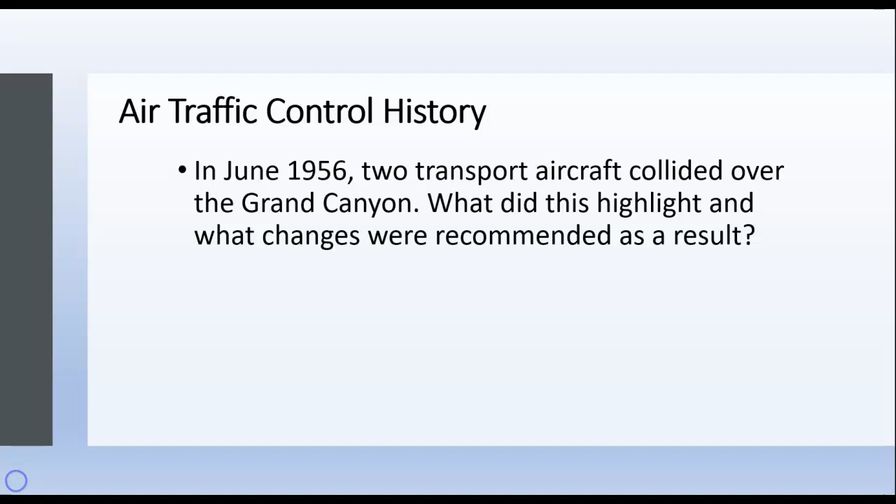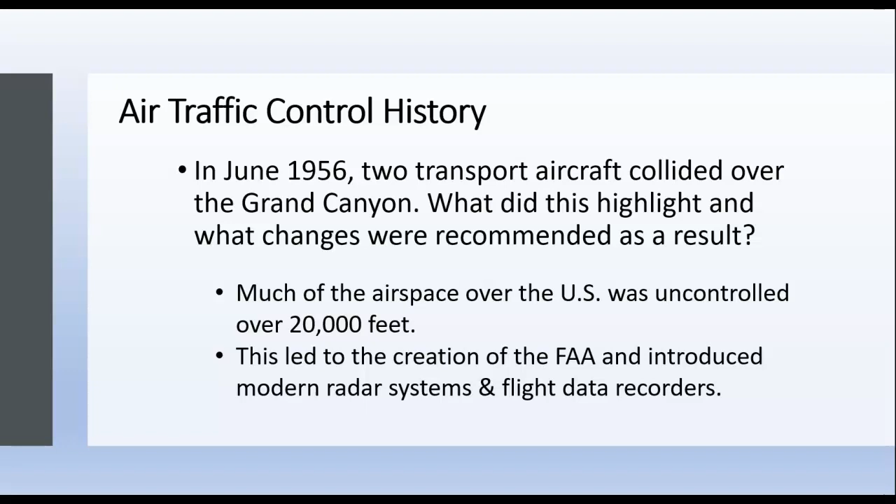In June of 1956, two transport aircraft collided over the Grand Canyon. What did this highlight, and what changes were recommended as a result? Much of the airspace over the U.S. was uncontrolled above 20,000 feet before this time. This led to the creation of the FAA and introduced modern radar systems and flight data recorders. Before 1956, there was no FAA, and no radar systems or flight data recorders in existence at the time. However, in December of 1960, when the FAA was just two years old, two transport aircraft collided again, this time over New York City, while they were in a holding pattern.

Why did this happen, and what happened as a result? One of the aircraft was a DC-8, and it had navigational problems and was flying at excessive speeds. The New York City towers lacked proper surveillance radar, so they couldn't really see the problem as it was occurring. As a result, equipment upgrades were made and new speed limit rules were mandated. This is when the 250 knot speed limit within 30 nautical miles of an airport below 10,000 feet came about.

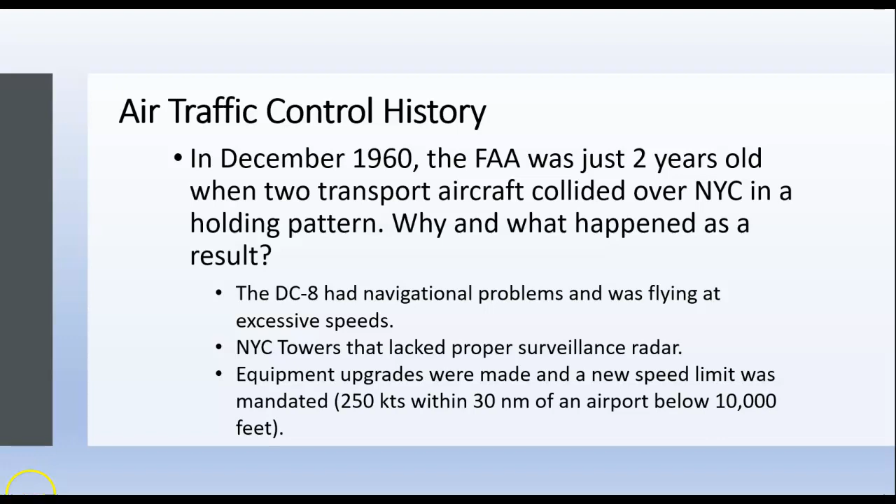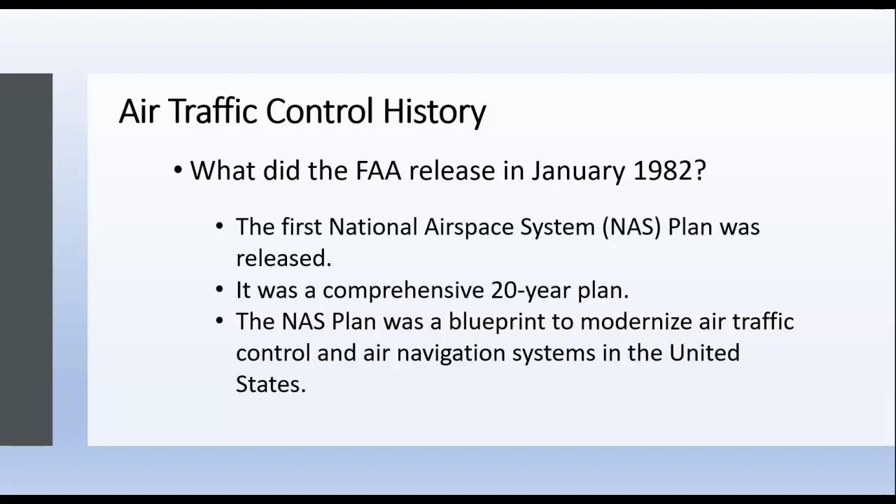In January of 1982, the FAA released what was called the National Airspace System Plan. It was a comprehensive plan over the next 20 years, a blueprint meant to modernize air traffic control and air navigation systems in the United States.

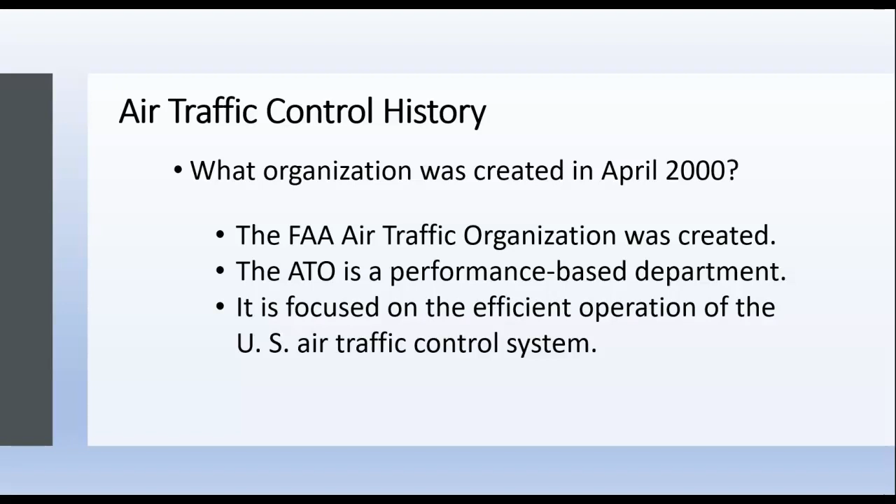In April of 2000, the FAA Air Traffic Organization was created, or the ATO. The ATO is a performance-based department focused on efficient operation of the U.S. air traffic control system.

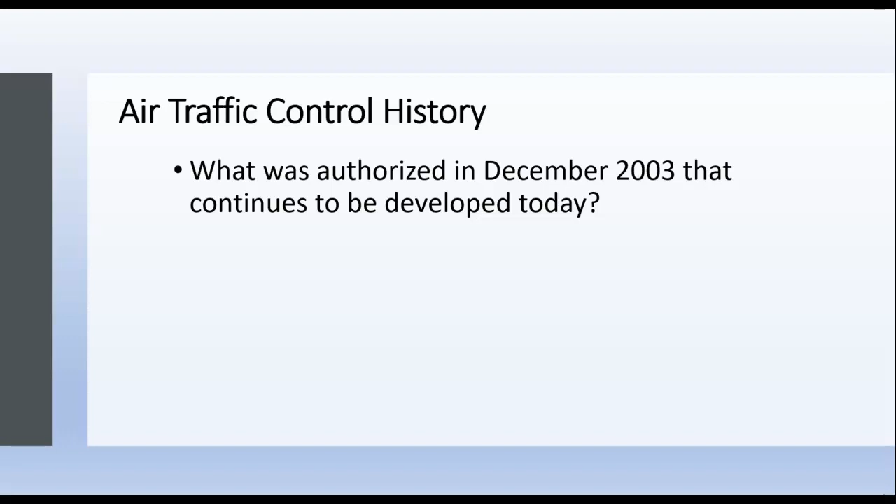After the National Airspace System Plan expired in 2002, another plan was authorized in December of 2003, called the Next Generation Air Transportation System, or NextGen for short. NextGen is based on GPS, Global Positioning System, technology and computer technology. Rather than depending on the old radar-based technology, NextGen is moving toward more satellite-based navigation and digital communications.

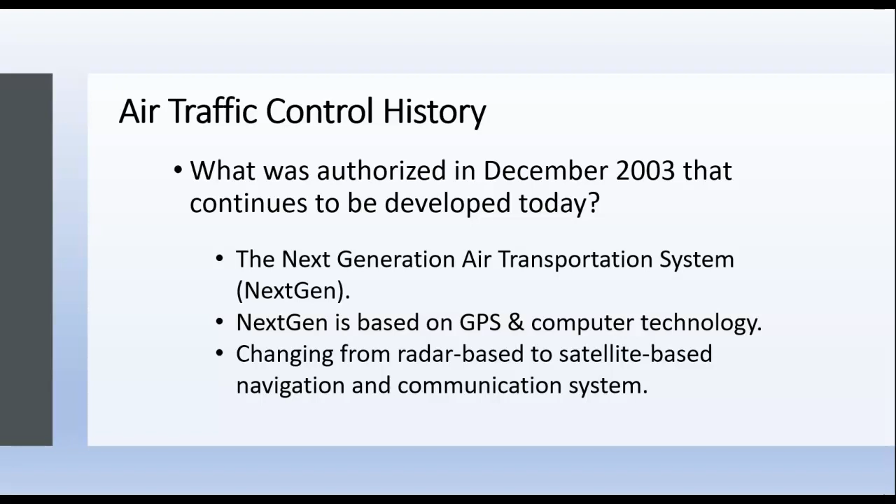One of the most significant occurrences in the history of air traffic control happened in August 1981, after air traffic controllers in the United States went on strike over labor conditions. The FAA fired over 11,000 air traffic controllers, and it took the FAA almost 10 years before staffing levels returned to normal.

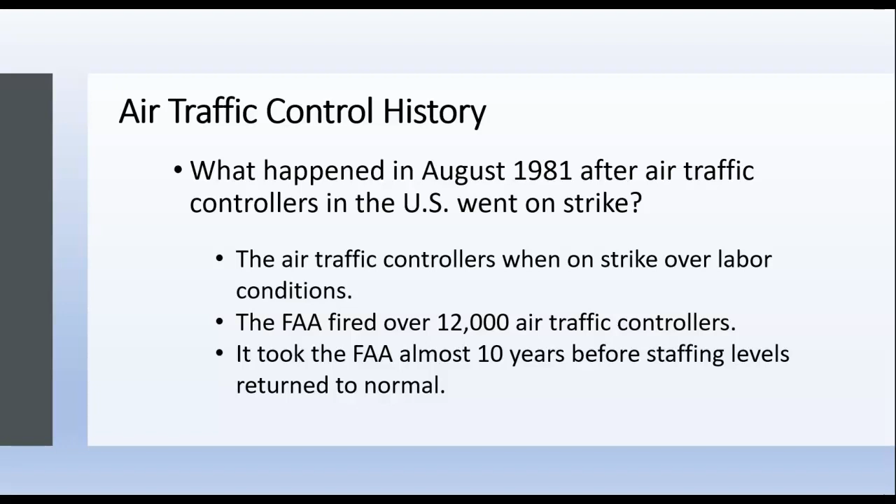When discussing air traffic safety systems, it's important to understand the four categories of airspace designated by the FAA. The first is positive controlled airspace, areas where the FAA is responsible for separation of all traffic, whether under visual flight rules or instrument flight rules. Examples include Class Alpha airspace at 18,000 feet or above, or Class Bravo airspace at the busiest airports.

The next category is controlled airspace, where ATC separates IFR traffic, but VFR pilots are responsible for providing their own separation from traffic, weather permitting. The next category is uncontrolled airspace, where pilots must provide their own traffic separation.

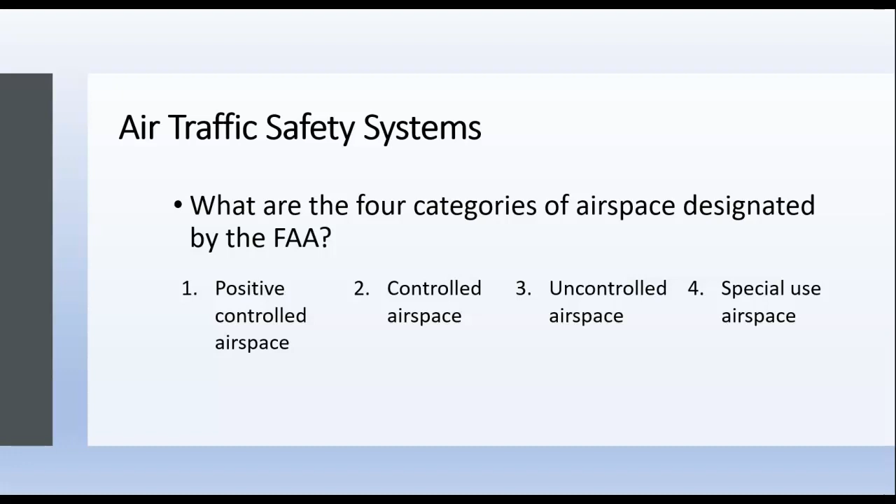The final category is special use airspace. This is where air traffic can be prohibited or restricted under special rules, such as temporary flight restrictions.

There are three types of basic air traffic control facilities in the United States. The first is air traffic control towers, or ATCTs. Air traffic control towers are the most visible facility. You can see air traffic control towers at Class Bravo airports, Class Charlie airports, and Class Delta airports.

The next facility is called Terminal Radar Approach Control, or TRACON. These are approach controls usually at Class Charlie and Class Bravo airports. The third is Air Route Traffic Control Centers, or ARTCCs, which usually take over after an aircraft leaves a TRACON control area, usually at a certain altitude and above.

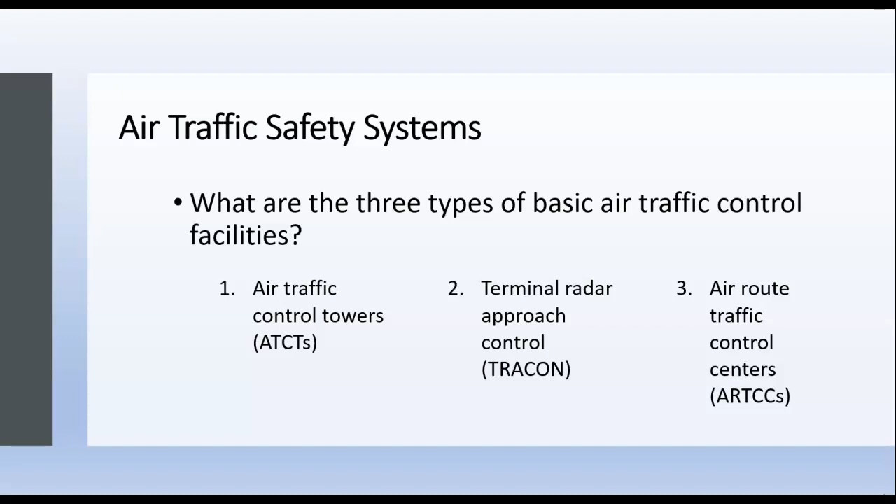There are three basic NAVAIDs, or navigation aids and radar surveillance equipment, used by the air traffic control system for navigation. The first are known as VORs, short for Very High Frequency Omnidirectional Range. A VOR is a radio station that broadcasts 360 degrees of radials from the station, and a properly equipped aircraft can use a VOR to aid in navigation.

The second is an ILS, or Instrument Landing System, which can be used by an aircraft in limited visibility to guide it to a landing on a runway. And an ASR, or Airport Surveillance Radar, can be used by a controller to guide an aircraft to a landing on a runway, again in limited visibility.

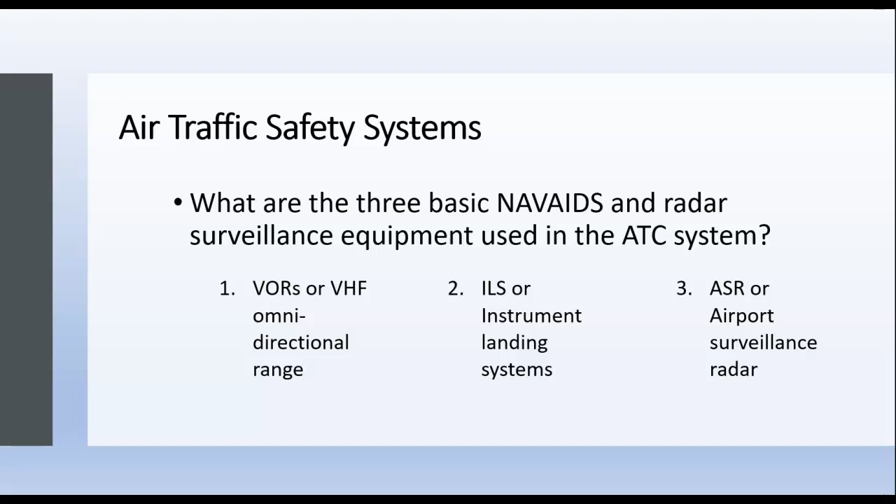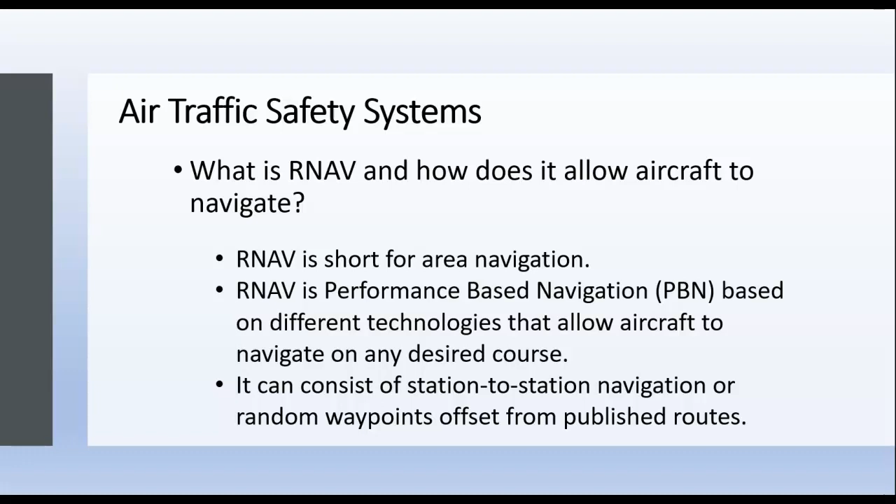RNAV is short for Area Navigation, and it is a performance-based navigation, or PBN, based on different technologies that allow the aircraft to navigate on any desired course. It can consist of station-to-station navigation, for example from VOR to VOR, or it can use random waypoints offset from published routes.

The Global Positioning System is the newest navigation system. It's based on satellites, so it's space-based, and it provides three types of information. The first is position—GPS can accurately determine where you're located on the globe. The next is velocity, or speed—it can tell you how fast you're going. And also time—it can give you your estimated time of arrival or estimated time en route.

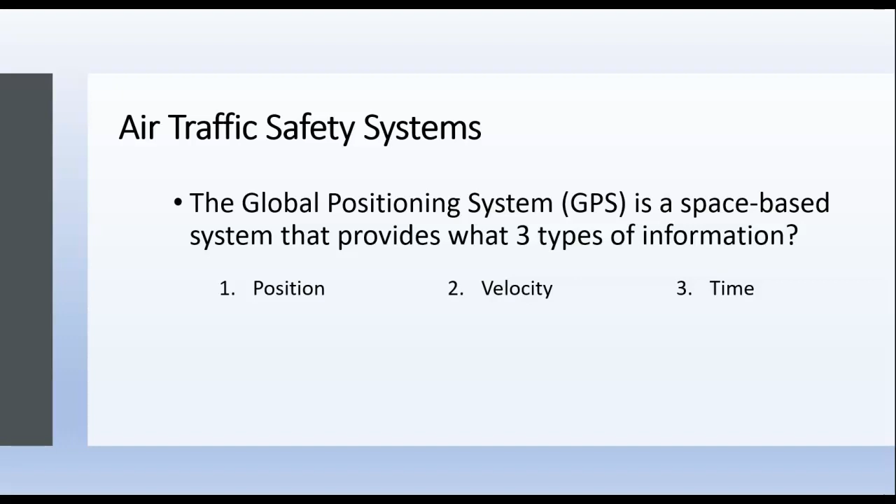The GPS system consists of three different segments. The first is the space segment, which consists of 21 satellites plus 3 operational spares. The next is the control segment, which consists of 5 ground monitoring stations, 3 ground antennas, and a master control station. And finally, there is the user segment, which includes the antennas and receiver processors that provide positioning, velocity, and precise timing to the user.

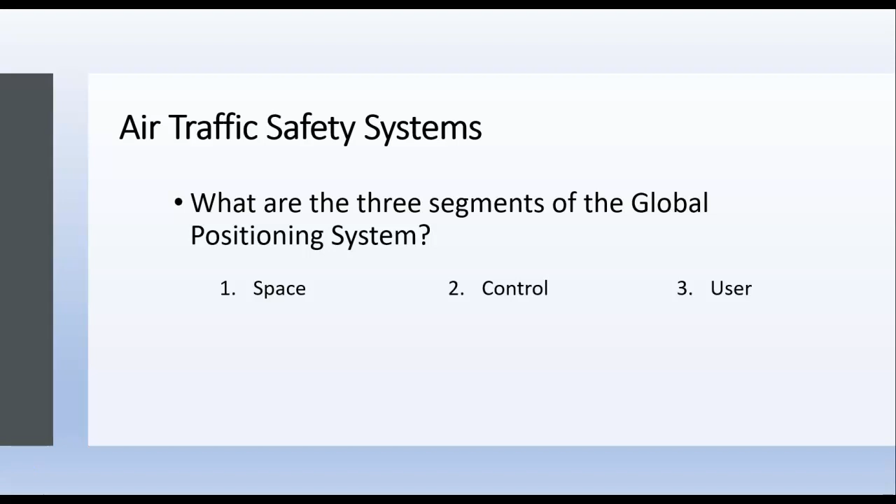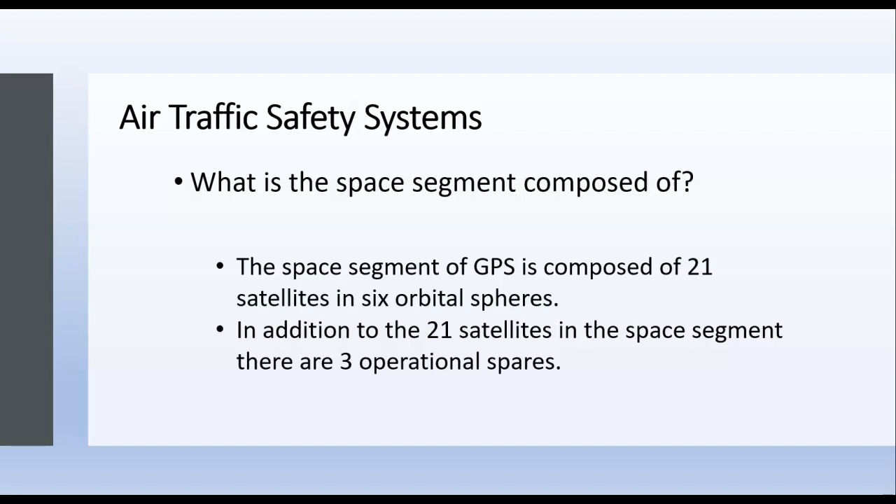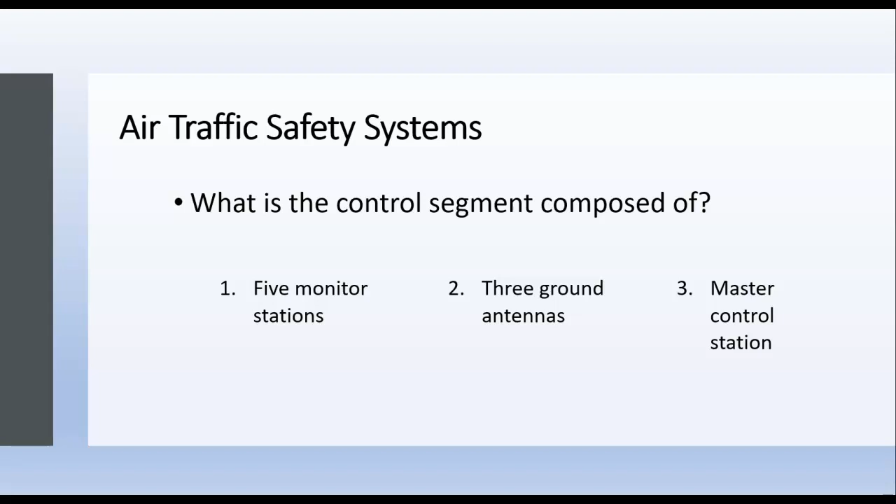Again, the space segment includes 21 satellites that orbit the Earth in 6 orbital spheres, and there are 3 operational spares which can take over in case one of the 21 satellites malfunctions. The control segment consists of 5 ground stations that monitor the health of the system, 3 antennas, and a master control station. The user segment consists of equipment in the aircraft, including antennas and receiver processors.

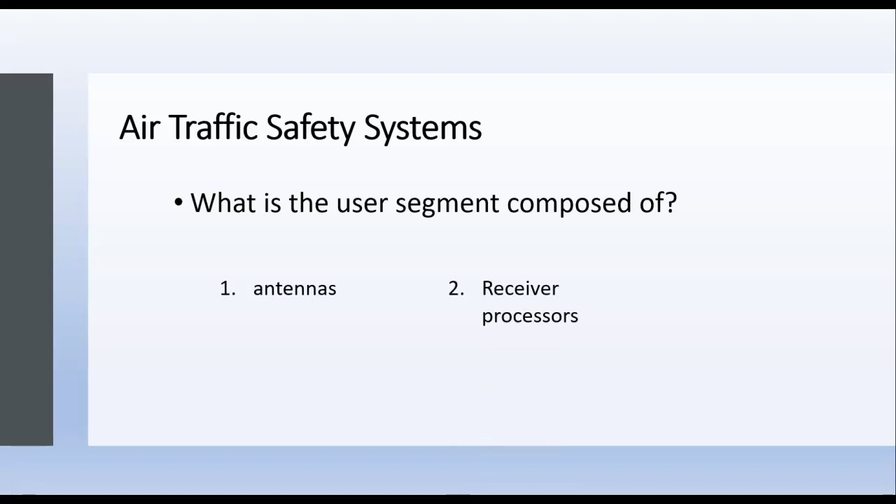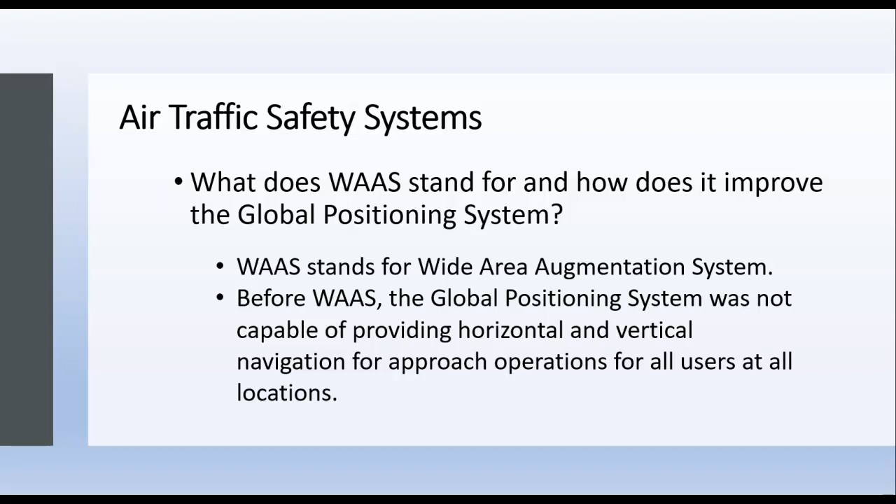A vast improvement in the Global Positioning System is called WAAS, which stands for Wide Area Augmentation System. Before WAAS, the Global Positioning System was not able to provide vertical navigation—in other words, it couldn't guide an aircraft down to a runway for landing. It could only provide horizontal navigation. With the advent of WAAS, aircraft can now be guided both horizontally and vertically.

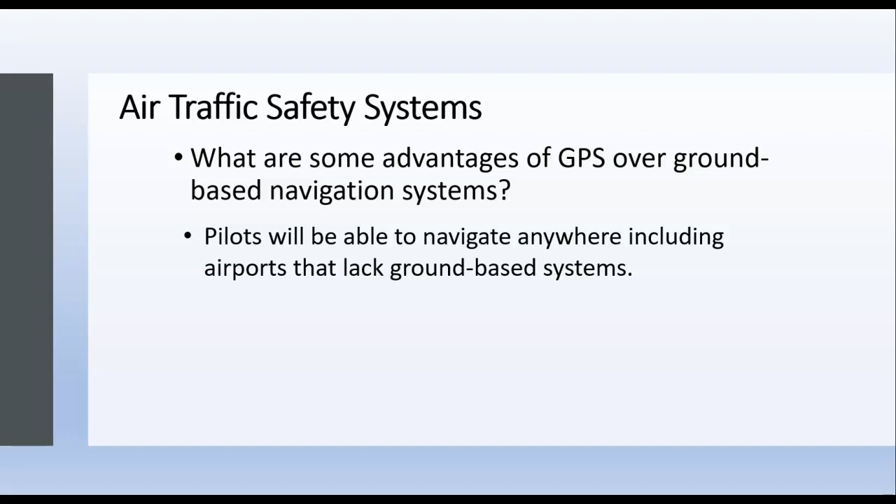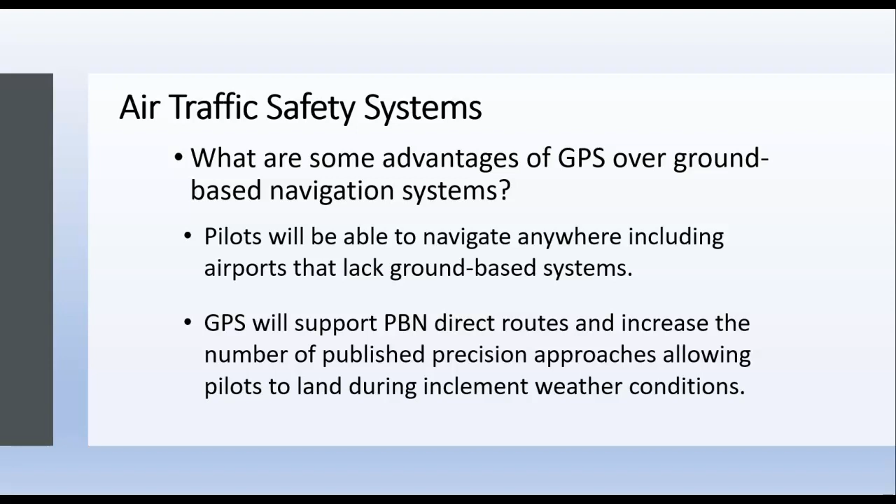GPS provides several advantages over ground-based navigation systems like VORs and ILSs. Pilots will be able to navigate anywhere, including airports that lack ground-based systems. In addition, GPS will support performance-based navigation direct routes and will increase the number of published precision approaches, allowing pilots to land during inclement weather conditions.

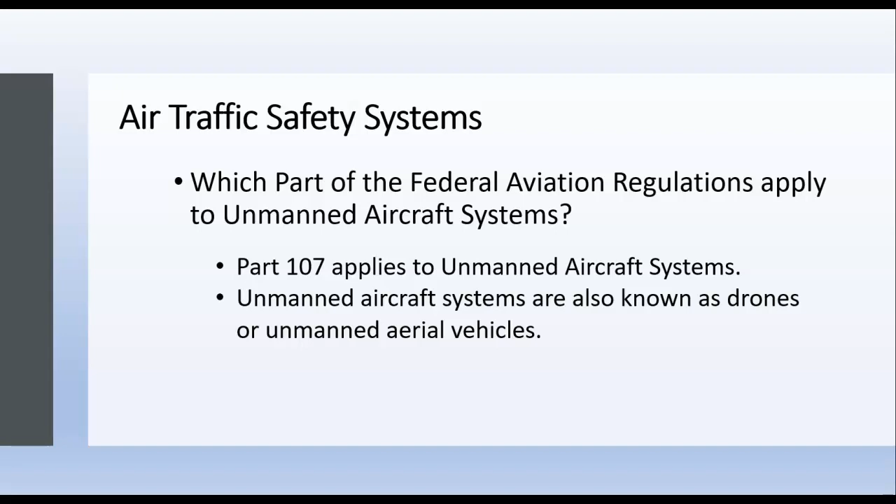A recent change to the air traffic safety systems is the inclusion of unmanned aircraft systems, or UAS. Federal Aviation Regulations Part 107 applies to unmanned aircraft systems, also known as drones or unmanned aerial vehicles. Part 107 is where you'll find all the rules and regulations as they apply to unmanned aerial systems.

There are certain limitations on weight and altitude that can be flown by UAS. Part 107 defines a small UAS as weighing less than 55 pounds. It also limits small UASs to under 400 feet of altitude, 400 feet AGL, and only during daylight hours. Part 107 doesn't apply to model aircraft like non-commercial drones and radio-controlled aircraft.

Also included in Part 107 are pilot requirements to qualify for a remote pilot certificate, and also operational rules. After August of 2016, drone operators who have successfully passed the written knowledge test and received a remote pilot certificate from the FAA can begin operations in Class Golf airspace at or below 400 feet AGL without contacting ATC. As the UAS industry continues to grow in the future, we should see changes to FAR Part 107.